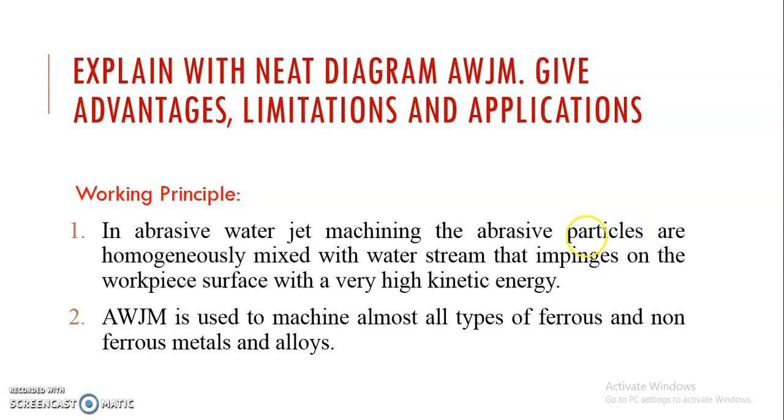In abrasive water jet machining, abrasive particles are mixed with water in a homogeneous fashion, and then under pressure they impinge on the workpiece surface with very high kinetic energy. This is the basic principle of how abrasive water jet machining works. This machining method is useful for all types of ferrous and non-ferrous metals and alloys. We will study how it works exactly.

The working principle of abrasive water jet machining uses very high pressure and velocity of water, with pressure ranging from 1500 to 4000 meganewton per centimeter square, bombarding the workpiece. Along with that, around 30% abrasive particles ranging from 10 to 150 micron are mixed with water, and then under pressure with high kinetic energy they impinge on the workpiece.

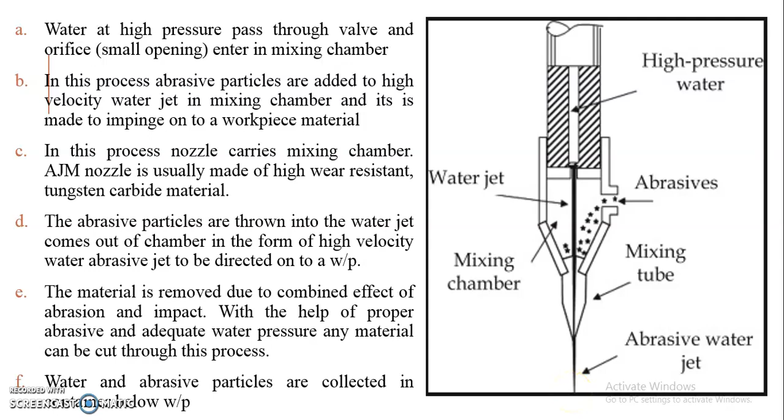Keep in mind, once this water and abrasive particles are used, they are collected in the container below the workpiece. So below this jet a workpiece is located, and after removal of material, all the water, abrasive particles and the removed material get collected in the pan or container below the workpiece. So what are the advantages?

Before going to the advantages, one must focus here: water under high pressure passes through one passage from the top side. Through the orifice we are passing it to the mixing chamber, and from another way we are adding the abrasive particles, at around 30% of the total quantity of water, mixed with this water jet, and then we are passing it through the nozzle. Below this nozzle a workpiece is located, and the jet of water impinging on this workpiece will remove the particles of material.

See how it happens? Because of the high kinetic energy of water, once it impinges on the workpiece, its velocity gets reduced and that gets converted into high pressure. So this erosion, meaning removal of material, takes place because of high pressure which is greater than the strength of the material. So this is the working of abrasive water jet machining.

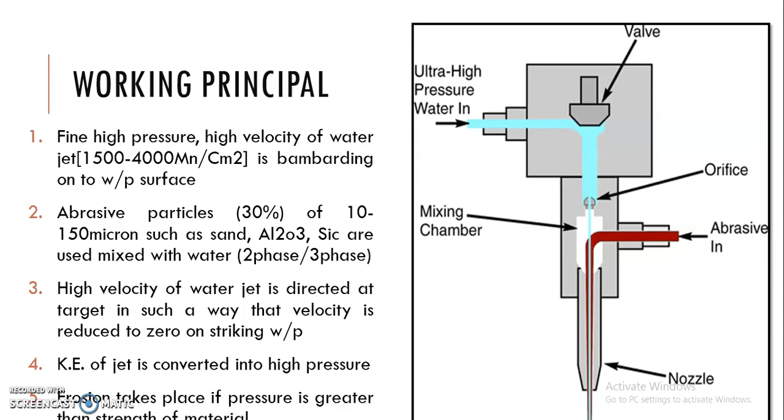What are its advantages? It does not produce much residual stress, and particularly it does not cause any thermal damage. There is no heat generation, as there is in the EDM process, ECM process, or ultrasonic machining process. There is heat generation in those methods, but in this method there is no heat generation, that's why there is no thermal damage.

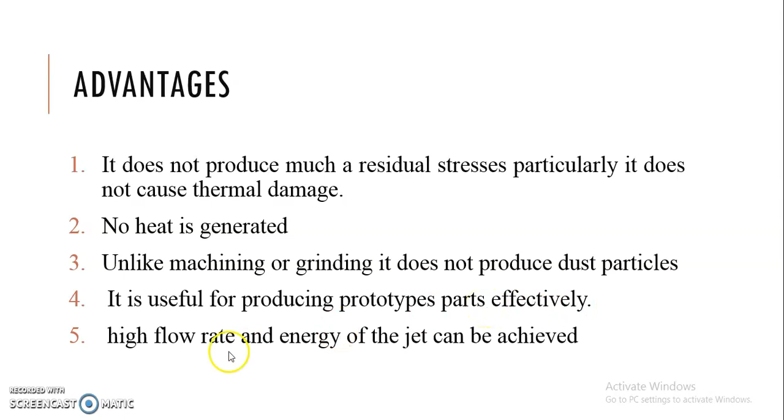Unlike machining or grinding, it does not produce any dust particles, because during a grinding or machining process, the removed material may injure a human being. Such removed material or dust particles will not be produced by this machining process. It is helpful for producing prototype parts and small components effectively. High flow rate and energy of the jet can be achieved through this process.

What are the disadvantages? One of the main disadvantages of water jet cutting is that a limited number of materials can be cut economically. So for large production it is not effective. If you want to machine a specific or critical component, then it is economical, but only for a limited quantity of material.

Another disadvantage: very thick parts cannot be cut by AWJM, because with the quantity of water and abrasive particles we are passing through the mixing chamber, its strength is only enough to remove material of very small thickness; very thick material cannot be machined.

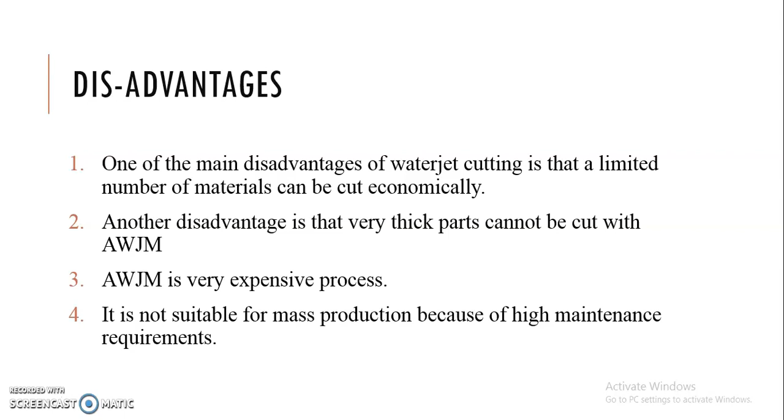Obviously it is an expensive process, and it is not suitable for mass production, because we require maintenance. The mixing chamber, valve, orifice and nozzle are subjected to very high pressure, so to sustain that pressure, continuous maintenance is required.

What are the applications? We can cut soft metals as well as alloys: copper and its alloys, tungsten carbide, lead and aluminum. We can even cut non-metals, such as concrete, graphite, silica, glass, acrylic, and sandwiched honeycomb material used in aerospace industries. So for cutting non-metals also we can use abrasive water jet machining.

Generally, if you want to remove paint from a wall or from a vehicle, we can prefer abrasive water jet machining. For cleaning purposes also, in automobile industries we use abrasive water jet machining. Even in textile and leather industries we can prefer abrasive water jet machining. So these are certain applications.

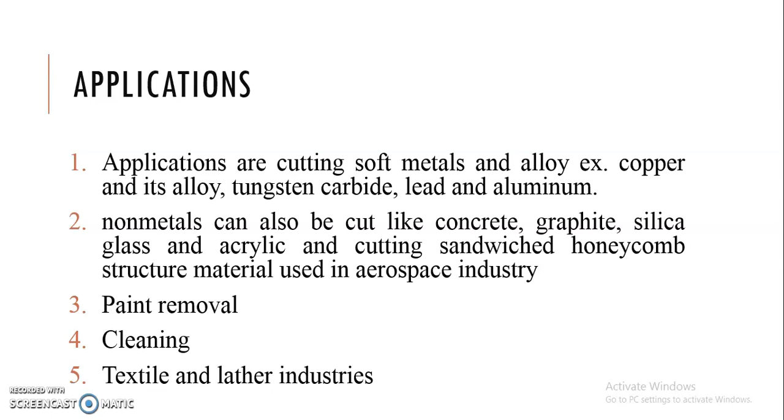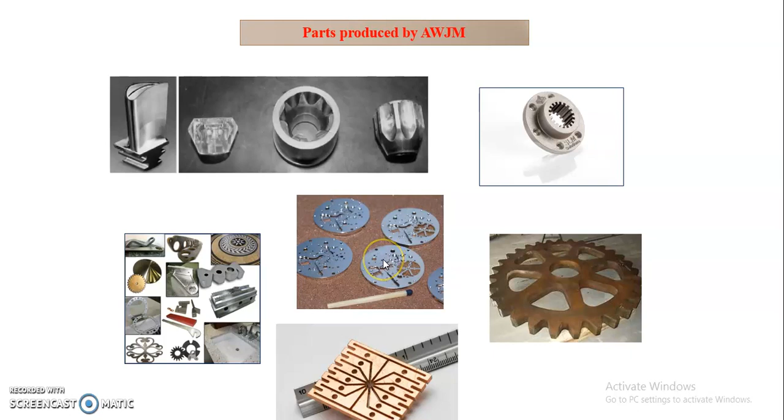You can see we can produce such a disc; such critical shapes we can generate on material, on non-metals also. Even for metals we can prefer it, and such holes we can produce inside the metal. Very small holes, even in microns, we can produce with the help of abrasive water jet machining.